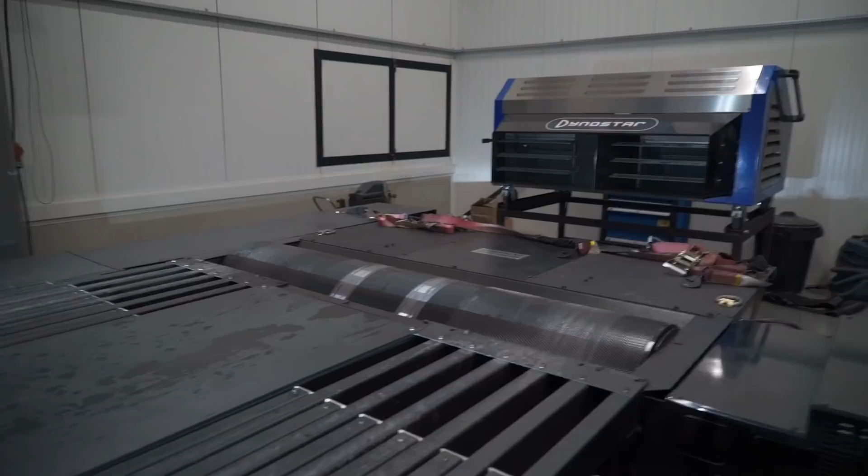What's the time right now? About 8? It's around 8, yeah, it is going down.

So what are we saying, Pete? You been alright? Feels like we've been doing this for ages. How long have we been to see you talking again? Over a year, haven't we? Well over a year. Well, probably since you came down. I think it was September 2017. Yeah, I knew as soon as I drove your car, Peter, I was like, it has to be like yours, basically.

It's not going to be quite your car, is it? But yeah, it's going to be, I think, pretty close. Obviously you've probably seen the comments already - what are you doing, this is too much power for rear-wheel drive. If I don't have the correct setup, then it's not true, so...

Yeah, we call Peter the mad scientist. He don't mess, trust me.

So what is it we're actually going to be doing today? We're just going to do the baseline run, so that we know before we start how the car came in. Because we're doing only wheel horsepower on the dyno, we're not converting it to crank. And then we know when it's coming out, when it's done, and then we can see the delta between the two, which is obviously the most important.

Because I found that in your M3, although it was very powerful, and yes, if you completely mashed the throttle to the ground you could overwhelm the rear wheels, it was very usable power. That's what it's about. With the Stage 2 turbos, people always say you are adding 150, 200 horsepower, you can't even get it to grip with the stock turbos. But like it's been said many times, the stock turbos spool very fast - the wheels, the tires, they can't handle it. With the Stage 2 turbos, you move the torque a little bit further in the RPM band, it's coming in a little bit more smooth. So the tires have more time, the tires and the suspension, to get away with the torque and provide more - you get more traction that way.

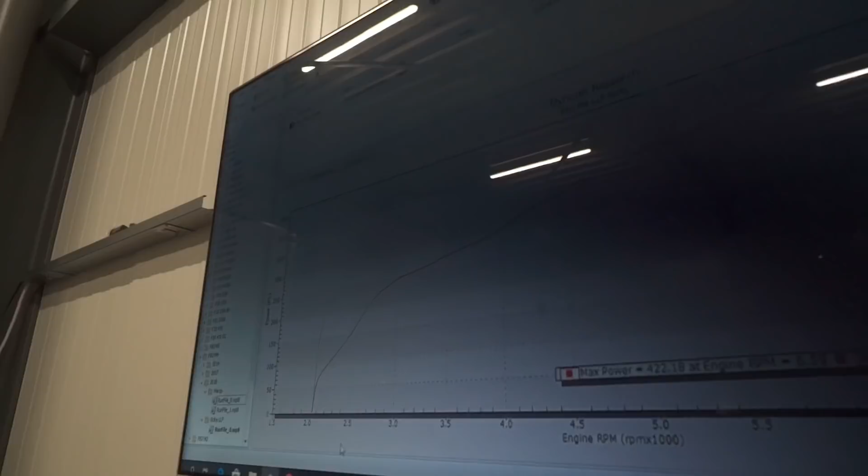This is your power, and this is your torque. Wow, that's really spiky there, isn't it? Yeah, so this is the wheel spin part here, isn't it? Yeah, this is at 2.5K, causing the wheel spin - you get spool around 2,700 RPM, but then you see it starts dropping off around 6.5, drops off a little bit.

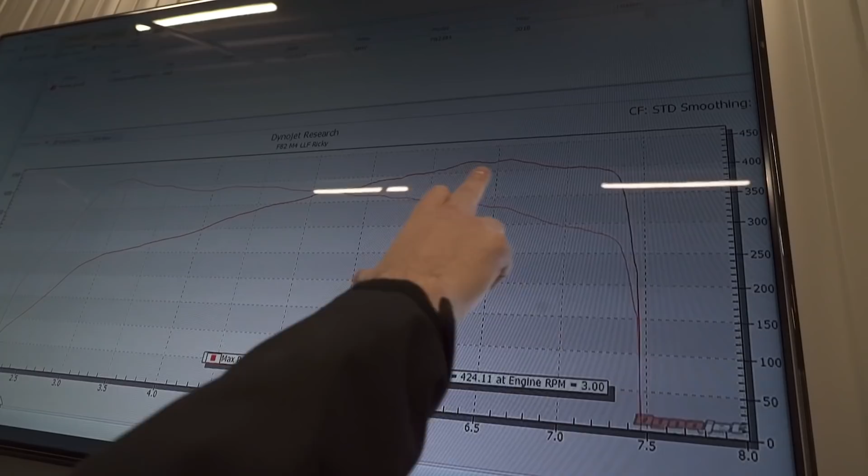You'll see when we put the stage 2 tune with stock turbos, the drop off will be similar. But obviously, we're going in now, aren't we?

This is Dream M4 right now. I love stage 1, stage 2 tuning cars, I love doing a few little exterior mods, but this is another level, man. This is because of owners coming to my channel - you start to understand that you can run bigger turbos, you don't have to necessarily build the engine. Of course, ideally you want to build the engine, but me as a YouTuber, look at how epic this is going to be for the channel.

Yeah boy, I'm just walking up and down because I actually need to piss.

To clarify that, Peter, so you're saying crank hub is the only known issue with these engines? You can always have mechanical failure or something, but the rods are okay, the pistons are okay. These engines are built to last, yeah.

What about torque? Are you going to cap the torque or? Yeah, we can, if we want, do over 1,000 Newton meters of torque, but at that point you cannot get away with it on the street - it's no fun if you can't put it down. Okay, it's fun to light up the tires, but in the end you want to be as fast as possible. So we cap it, and on a stock engine we cap it around 850-875 at the wheels.

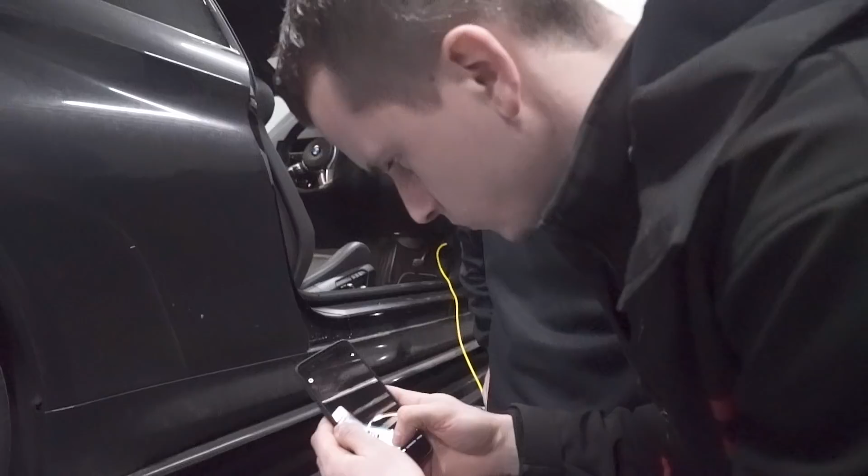So it's actually flashing now, Peter? Yeah, we're putting the stage 2 bootmod3 map on it, which we will obviously dyno after. So is it a stage 2 because I have the full exhaust? Yeah. And what's the power expected? Around 500 at the wheels.

500 at the wheels, so that's an 80 wheel horsepower increase. Yeah, so that's also different if you start from the competition pack model or the normal model. The competition pack model is just the same hardware, but with increased software parameters, so you get the same results with a non-competition model.

And how long would this take? First time it also does the unlock over OBD, takes around 4 or 5 minutes, but the next flashes will be 35 seconds. What's the reason you're doing the GTS software? It's putting additional clutch pressure on the clutches, so that it's better for the gearbox to handle high torque.

Alright, so Pete, you say it's complete now, yeah? It's loaded up? Yeah. And we are going to now dyno it again? Yeah, let's see what it does with the stage 2 bootmod3 map.

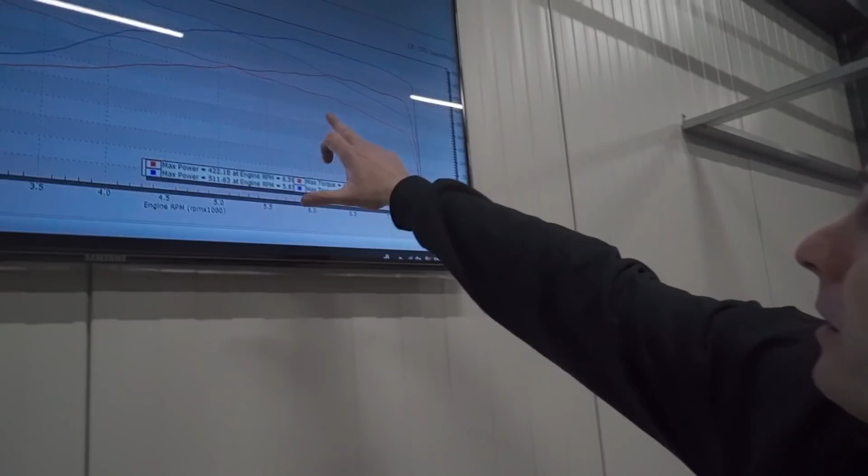What did it put out, Peter? We're seeing 511 at the wheels, which is pretty nice. 511, yeah? Yeah, as you can see, it's making peak power just before 6,000, then it's slightly dropping off.

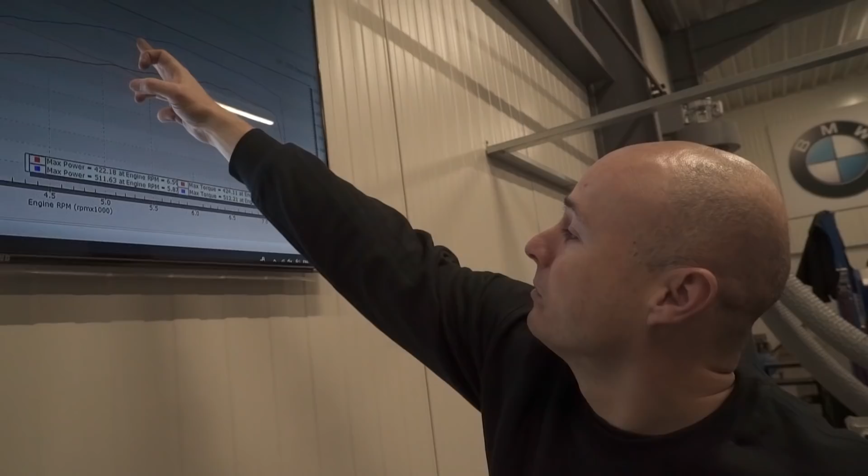Look how smooth that curve is as well, man. So I think with this curve, if you would shift around 7,000, 7,200, you fall back around 5,300, you get the best power band out of it.

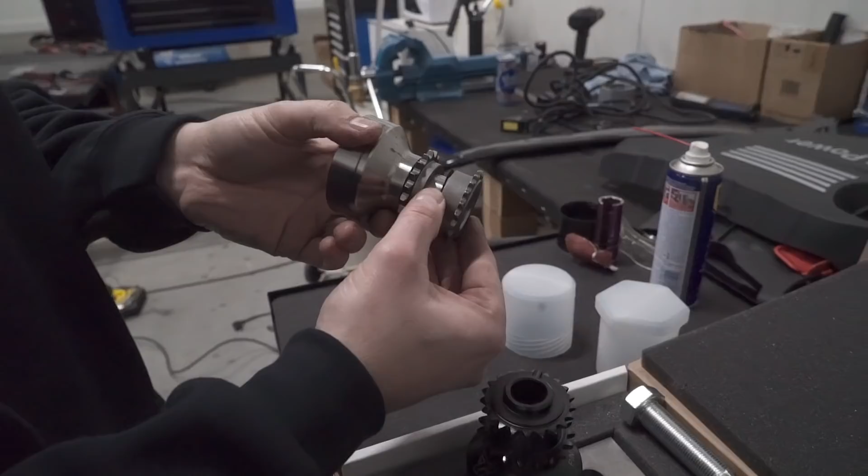So this is the original crank hub. You have your sprocket, and here you can see the friction plate. Alright, and you have that in between all parts. These have the sprocket for the timing gear for the oil pump.

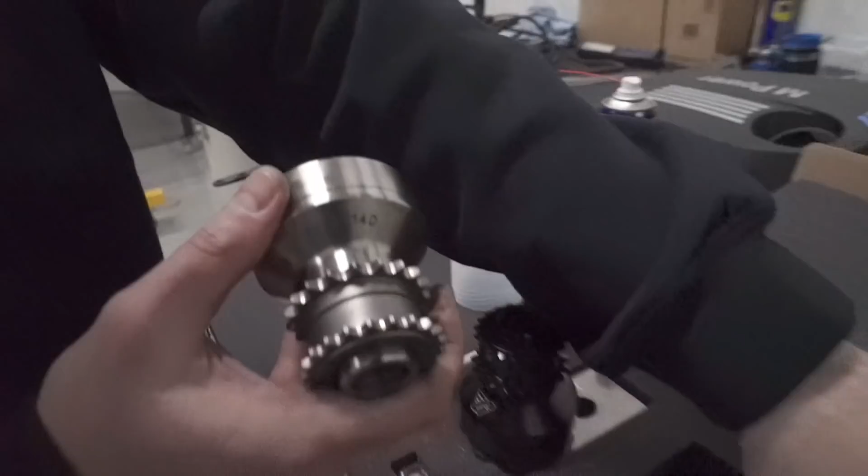What happens is that they shift because they are just put together with this long bolt. It's bolted into the crank and torqued to really high torque, but still this shifts and then your timing of the engine is gone. You get into limp mode. Fortunately the sensor picks it up and you don't have any permanent issue.

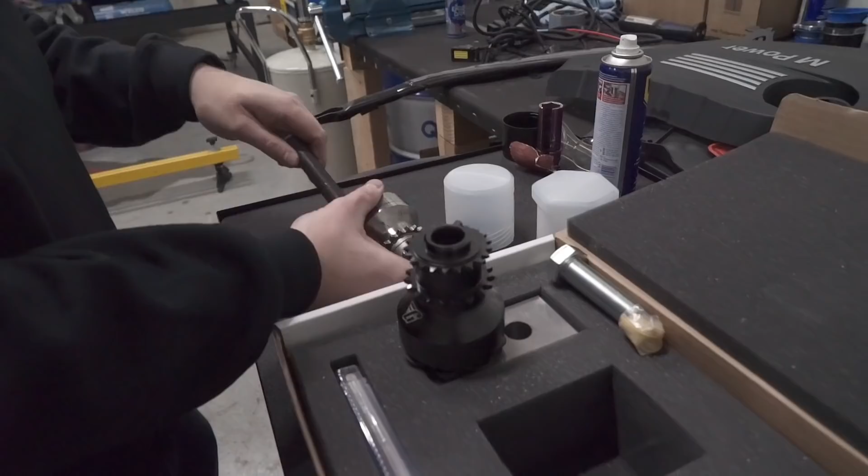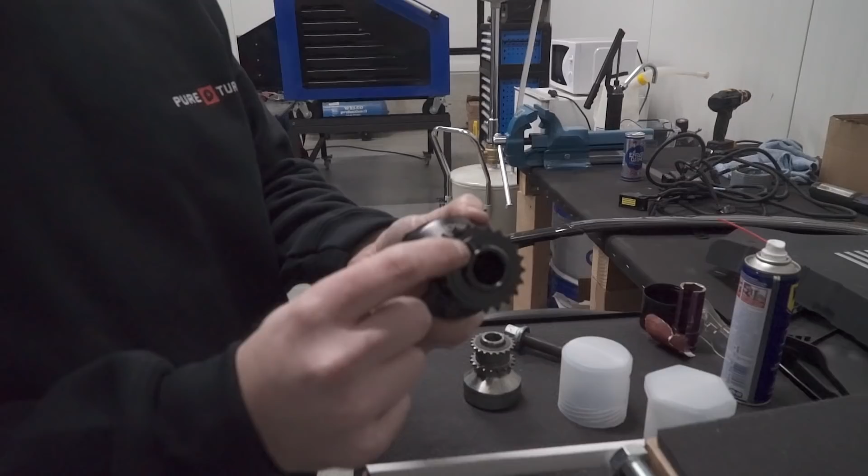But then if you have a keyed crank hub, we drill a hole in your crank from the bottom, using this we fix this - you can see it's a hole here. We fix this to the snout of the crank with the bolt, then we can drill it. So it's fixed, yeah? Yeah, so then we have a hole like where it needs to be, and this will fit the key in the crank. And then you see it's a one-piece design, it cannot mess up your timing anymore.

That is 500 wheel horsepower. Yeah, it almost feels more usable, like. I'm gonna have what, an extra 150 wheel horsepower on top of this? Well, it will come in more gentle.

Jeez, you know what, the exhaust definitely sounds better now, you know that? Can I go in second gear? Just. That was much better. Nice, very nice.